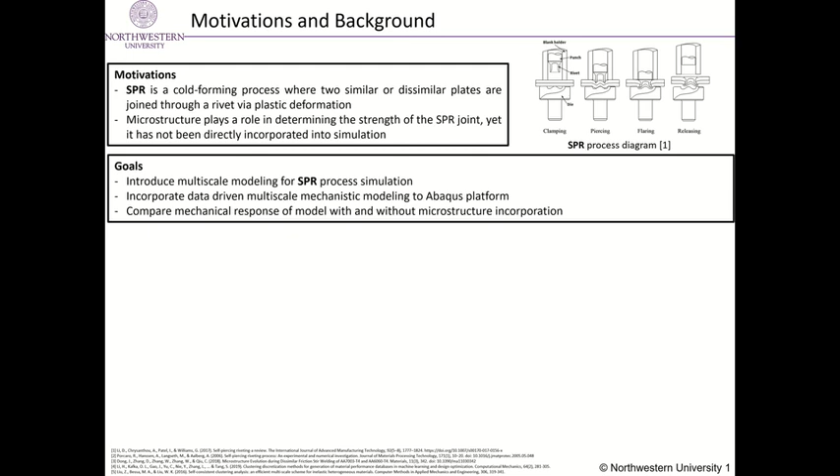Our goal is to introduce microstructure to SPR simulation through data-driven mechanistic modeling. Up to now, the SPR process has been primarily studied at the continuum scale, where material microstructure evolution is ignored. However, modern materials have tailored microstructures to achieve desired results, making the final microstructure state in the plates critical for joint performance prediction.

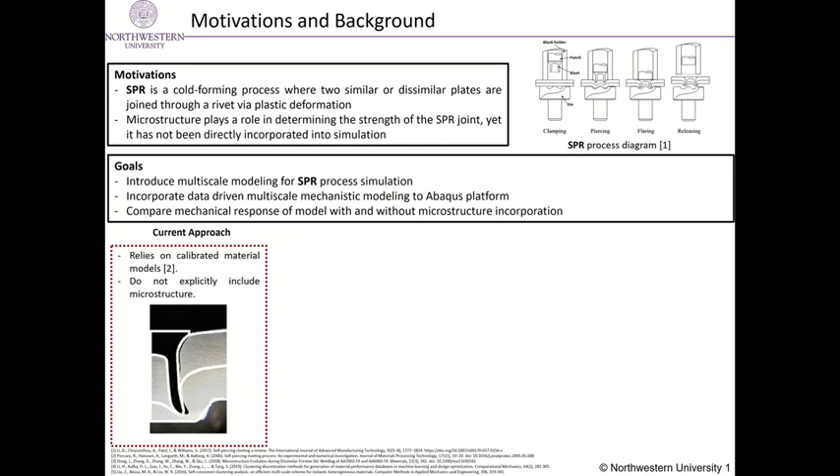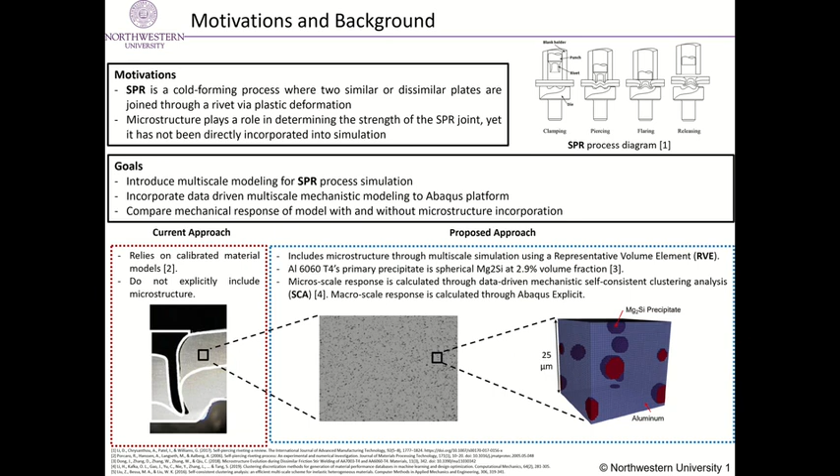Our primary goal is to use multiscale modeling to investigate the SPR process with real-time microstructure evolution history. The methodology laid down in this work shall pave the way in building a process-structure relationship for the SPR process. The SPR model contains the 6 parts shown.

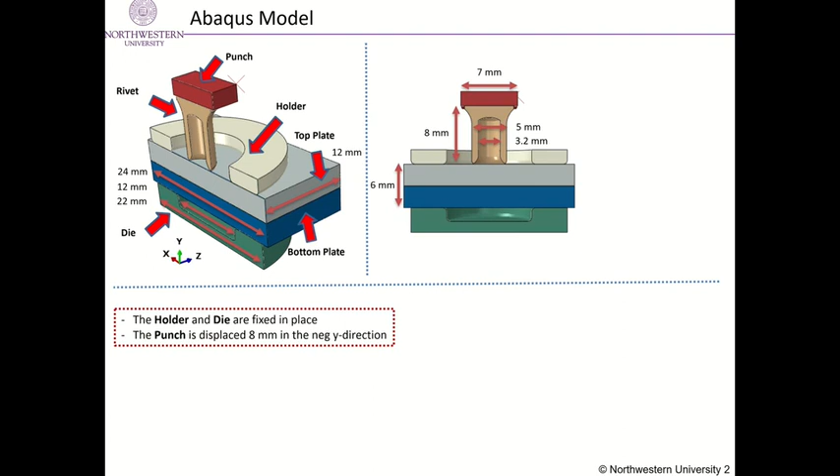The geometry is given. The holder and die are fixed in place. The punch is displaced 8 mm in the negative y direction, causing the rivet to move. The plates make up the multiscale region. In this region, microstructure responses at each integration point in the macroscale finite element are computed by RVEs. The RVE replaces traditional material laws and provides detailed microstructure evolution.

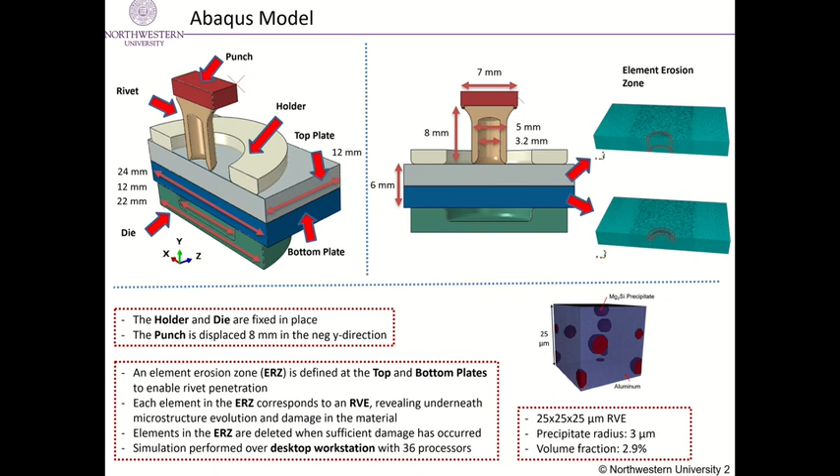To allow the rivet to penetrate through the metal plates, element erosion is activated in the model. The element failure is predicted by the RVE calculation. Note that we designed the element erosion zone to minimize the mass loss when using element deletion. Only RVEs within the element erosion zone will compute microstructure damage and RVE failure.

Material parameters for the aluminum plates and steel rivet are given. The non-concurrent model uses the built-in ductile damage model provided by ABAQUS. Here, the plastic displacement at failure and evolution function must be defined. Our concurrent model bases damage on the effective plastic strain. Once the RVE damage parameter surpasses the threshold, the element will fail.

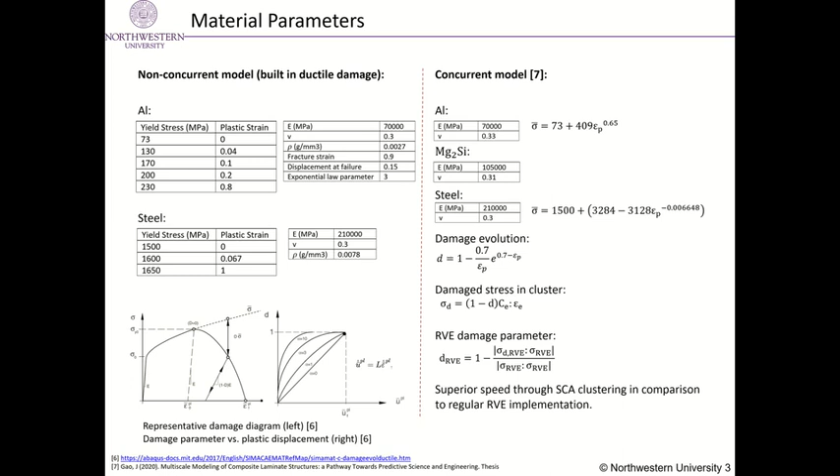Our method equips ABAQUS with real-time microstructure evolution enabled by SCA. Prediction of the microstructure damage and failure process is directly done by the RVE. Here are our results. The rivet comes down and penetrates the top plate. The rivet then proceeds to penetrate the bottom plate. Flaring begins to occur and the interlock between the rivet and plates is formed.

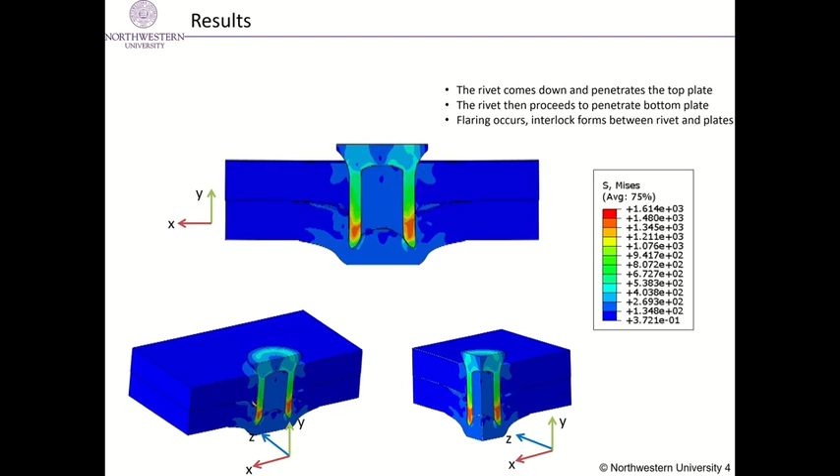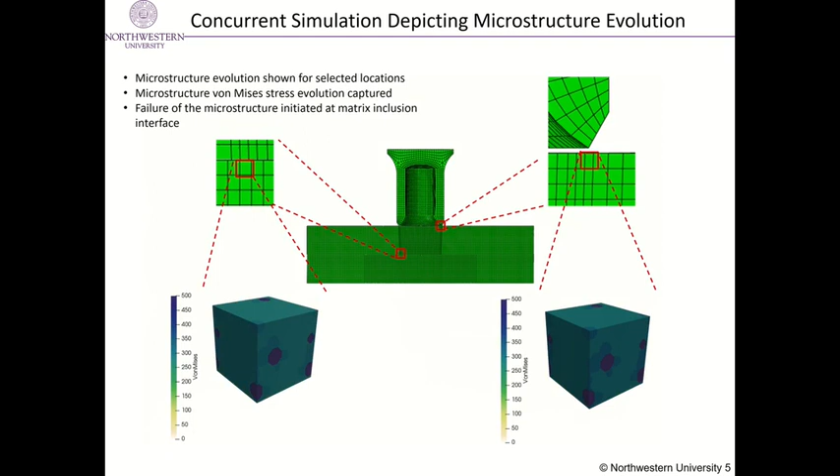Here we plot the Mises evolution in the two scales concurrently. The top circle corresponds to the initial position of the RVE on the right. It fails within the first few frames. The bottom circle corresponds to the RVE on the left. It fails as the rivet begins to penetrate the second plate.

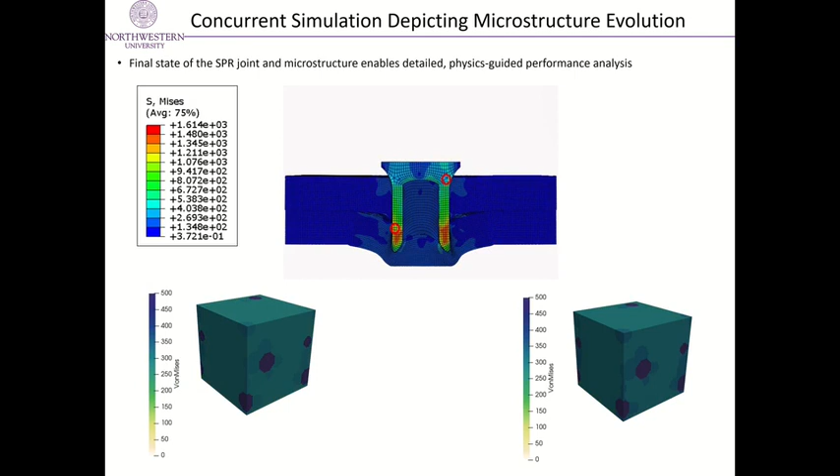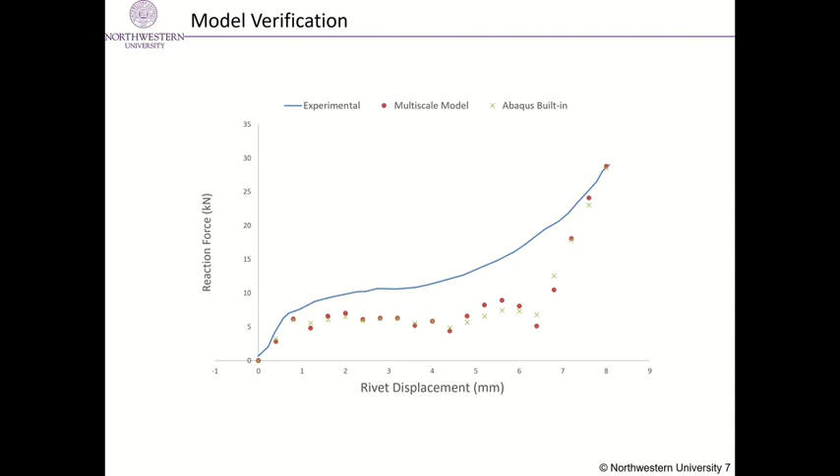We've shown how to explicitly incorporate microstructure in the SPR process. We've developed an efficient, real-time concurrent multiscale simulation in ABAQUS. The analysis shows how the impact of the microstructure can be important in designing the SPR process.